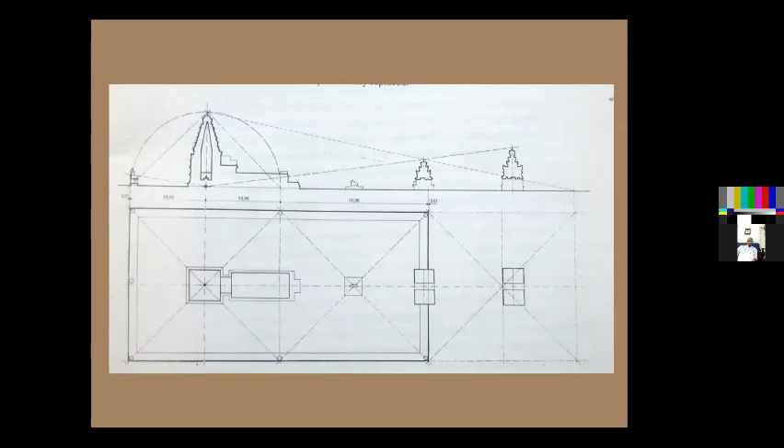See the foundation. In modern engineering, we say raft foundation. The whole thing is like the whole base. The existing foundation is only about 5 feet, 1.5 meters, and how they had prepared that. See, the first layer is laid in one direction. That is of granite pieces, approximately 3.6 meters by 40 centimeters by 60 centimeters, placed in one direction. The second layer is in another direction. The third layer is again coming back to the first, odd courses and even courses. They had arranged about 5 courses, over that the whole structure stands.

This acts like a raft. Whatever load comes, this doesn't have any unequal settlement. And they have done it on limestone. From where they got the knowledge? That is why I said the native engineering was very strong. They had all the basic things. See what they do, olden days, even in some of the villages still they do it. They'll excavate the whole foundation, not just below the walls.

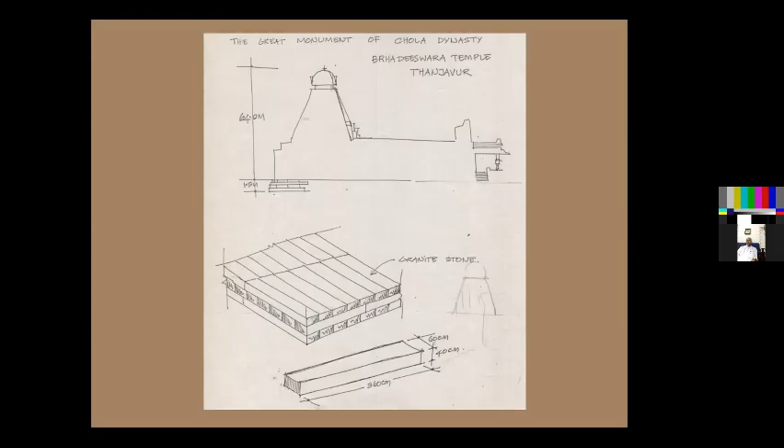If they are going for a structure, they will excavate the whole area and leave it for one season. They call it 48 days, one mandala, and leave it, expose it to sunlight and expose it to rain. Then the whole thing settles. Then they start going in for foundation work. So like that, they had given a lot of time for each and every procedure. See this, they have stacked one over the other, there is no mortar in between.

I am restricting myself to the temple construction, right? Even for a secular building, you should understand, this is the best example, a living example, 1,000 years old. We don't have a house about 1,000 years old. We have houses about 150 years, 200 years, not to this extent, but still, this is a place where we could see there is no mortar in between. See how they have placed it. This is a cantilever, this is a counterweight, and again a cantilever, counterweight, like that.

All these things come in the temple grammar. Everything has got a proper height, proper width. All those things come in their calculations. They take the unit as the main deity in the sanctum sanctorum. From there, all the multiplications start. First, the whole sanctum sanctorum in this temple is about 24 feet square. So from there, the whole thing starts.

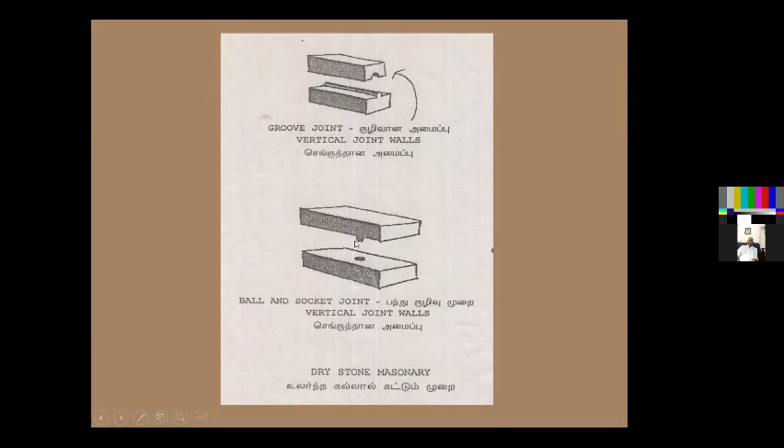Interlocking joints, all done in stone, mind you, not in wood.

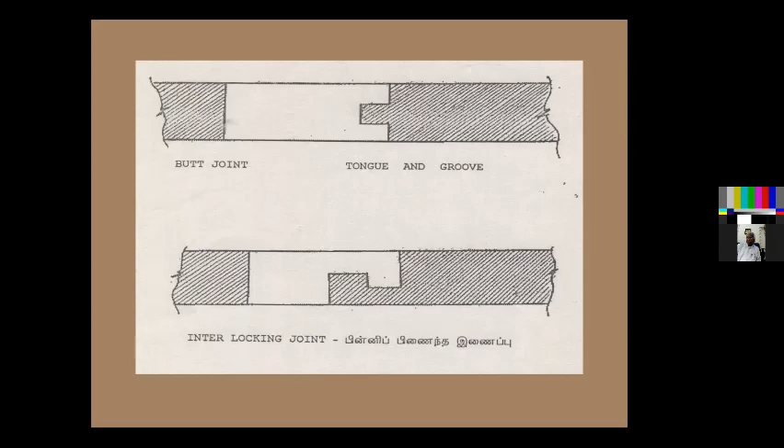See this, the ball and socket is an exaggerated drawing. This is how the whole stone stands. No mortar in between, mind you. And they have understood the basic structural principle of loose joints. See, that is a loose joint. Even when there is a mild tremor, it gets settled. It gives a small movement and then settles. So that is one of the highly technical knowledge points. If you have a loose joint, it doesn't fall immediately. It will accommodate the shock and adjust.

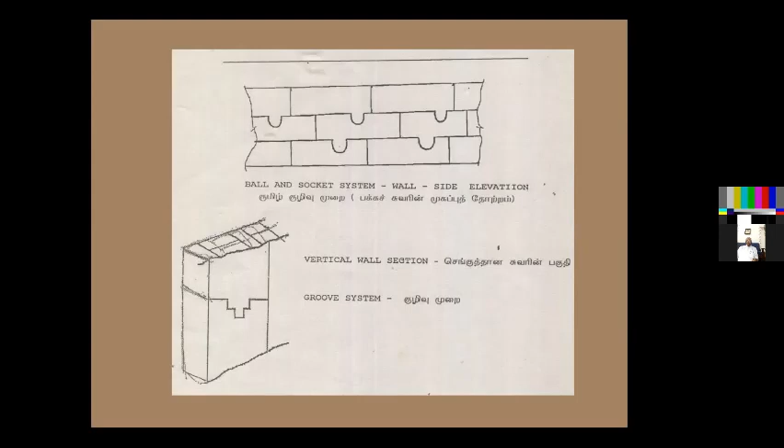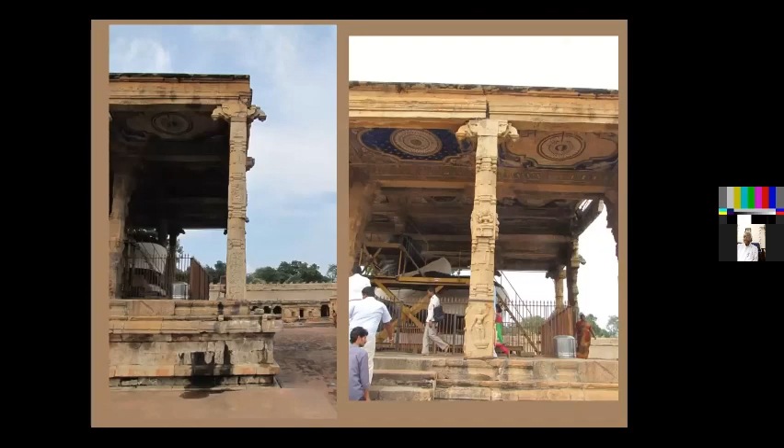See, coming to this, one of the mandapas here, I've taken this to explain to you a very simple principle of how the column stands, and what we are doing now. See the difference here. This is a column, an independent column, a freestanding column you can call it. The column is from here to here. And it stands on another rock, a rock bed. It's a bed block, you can call it. And it stands freely without any connection.

And there is another block here. This is a bed block to take the load of this beam. And this is embellishment or an ornamentation which gives beauty to that. They could have left it like this, but they would not. They have used these motifs. It is something like the banana flower. See this, they call it.

See the column size at the bottom, and the column size at the top. There is a small difference. The top is slightly smaller than the bottom. That itself makes it stand. Purely on gravity, it stands. Nearly about 650 years. This was built by the Nayaks. 650 years, and the column is a loose joint.

But how we do the column now, in modern engineering, we dig the foundation. In the hole, we go down and make a broader footing. With the steel rods, we bring it through the column to the top. The column is continuous from the foundation. We say the load gets distributed along it. But here also the load gets distributed without any connections from one element to another element.

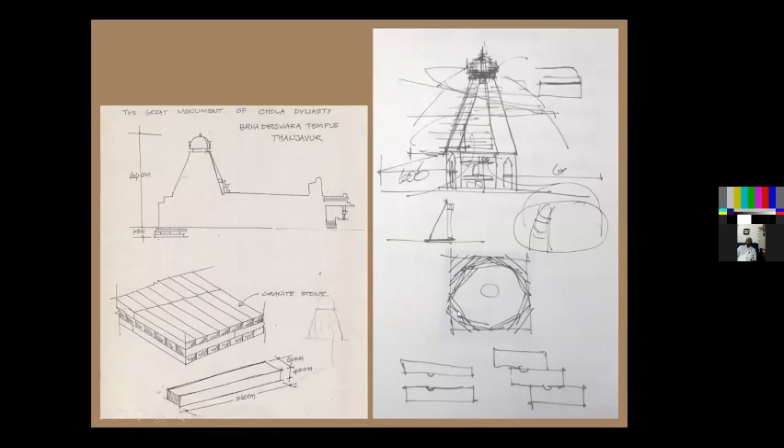Acting on it. It can take another 4 times more than the existing load. So on the calculation of soil mechanics, how they did it, we don't know. See this, 47.4 tons per meter square, and the resistance from the soil is 162 tons per meter square. So nearly 4 times the soil can take. So they have chosen the soil in such a way.

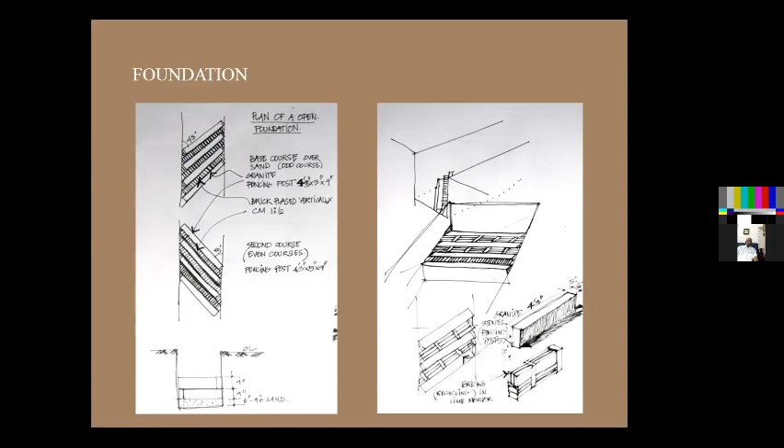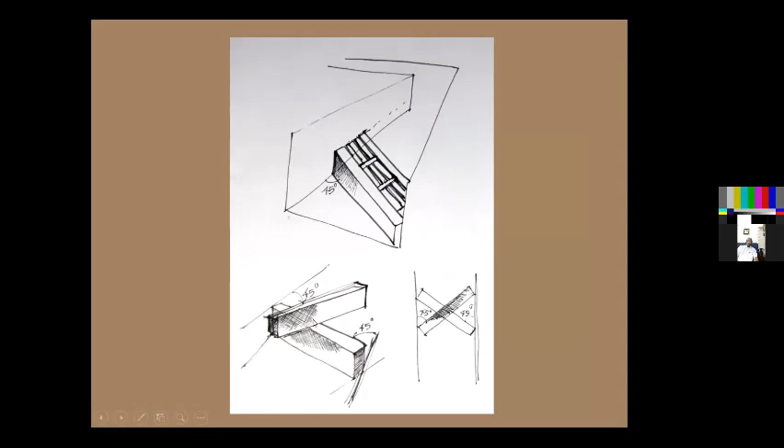About 45 degrees. See, look at how the wall, one stone is placed over that in 45 degrees. I have marked it here. Look at this. So whatever the load comes, it gets distributed throughout, and then again goes to the bottom like this. So once it goes down, it will be minimum. See the plan here.

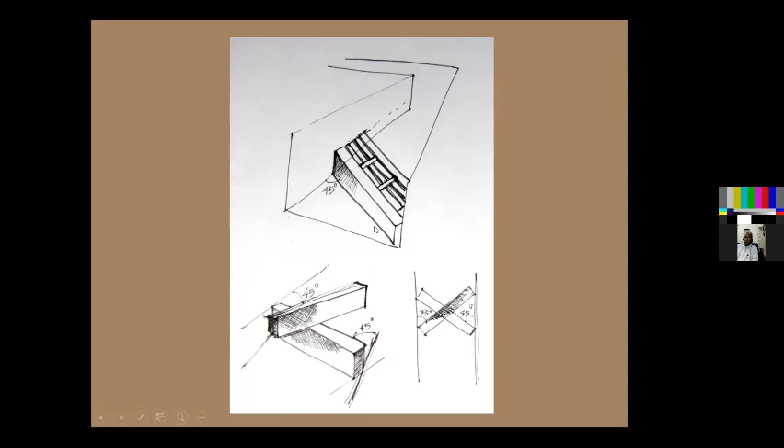At the right hand side of that. Look at this. This is a plan. This is a view. And this is another view. Foundation. See some of the existing structures. We have all precast. This is removed. You can remove piece by piece from top. Again, reassemble. While removing, they'll do the markings here, numbering, and then they can replace it.

That is why we say, even though it is a tension member, it stands on compression. In fact, whatever load comes over it, it's converted into a compression member. So even if the load comes over it at the cantilever here, it will be like a compression member only, which is attached. It stands on surface tension. The mortar is fixed on the brick on the sides.

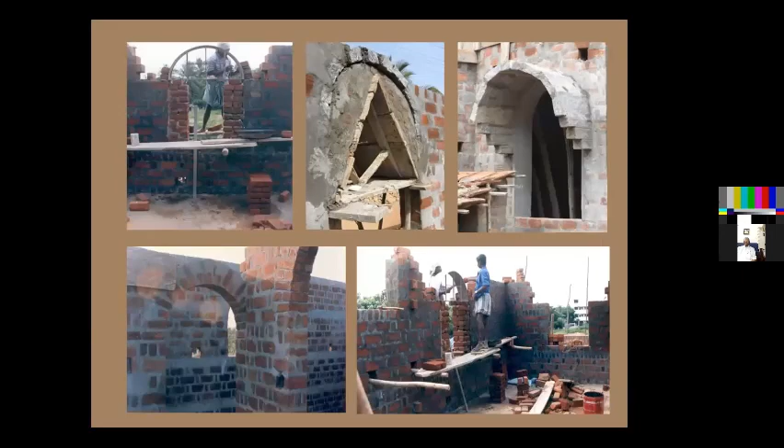For this, they'll prepare a mold at the bottom, and over the mold, they'll go on placing the bricks like this. And after setting, they'll remove that. There is no steel, no foreign body in that. In a cantilever, they had done it with brick. This is Marathas' work. See, in the same work what we do now, in many places, for all the compression members, they were using steel.

You don't need it. For a compression member, the curve itself takes the load. What is the arch? Arch is a compression member. Whatever load comes over it is transferred through this side. See, this is a 9-inch. If you do it with compression members, your cost of the house will be less. See this, I have used granite. No joints. The mortar is only lime mortar in between.

Lime, jaggery, and then we had also used very well ripe plantain fruit. And see this, it stands. Initially, you have a formwork like this, do the construction at the top, then remove this, and it stands. Very simple.

As an engineer, as a basic principle, we cannot accept steel in all the compression members. Why do you need steel? Once you put a foreign body inside, it gets corroded, it swells, and creates a lot of problems. So in a compression member, use only natural materials in the form of an arch or a segment of an arch, and it will stand.

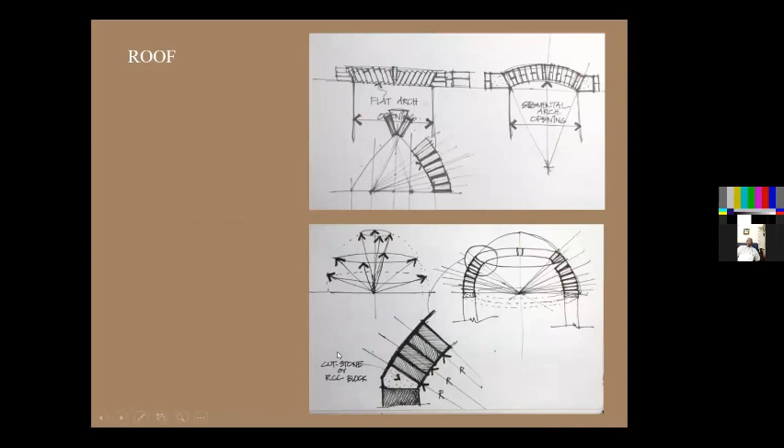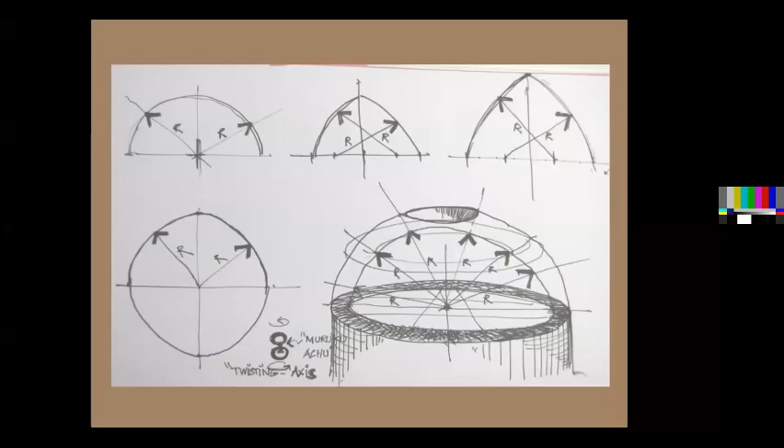The best example is a bamboo basket. When they make a bamboo basket, they do it with individual elements, and one method of doing it. I think I've given the basic principles.

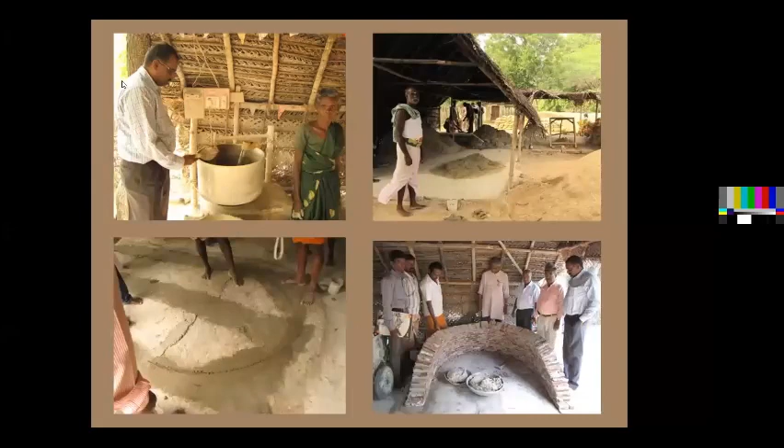See this, one of our great architects, Ramalingam, is inspecting one of the sites. We have done it with lime mortar and placed it. There's no steel in this whole structure. This is myself. See the curve, see from here.

It is a 2-point arch. From here we take this radius, and from here we take this radius, and it converges. You have a threaded wire from here and here, and you go on keeping the bricks at the same inclination as the wire travels, and you get this; it is converging.

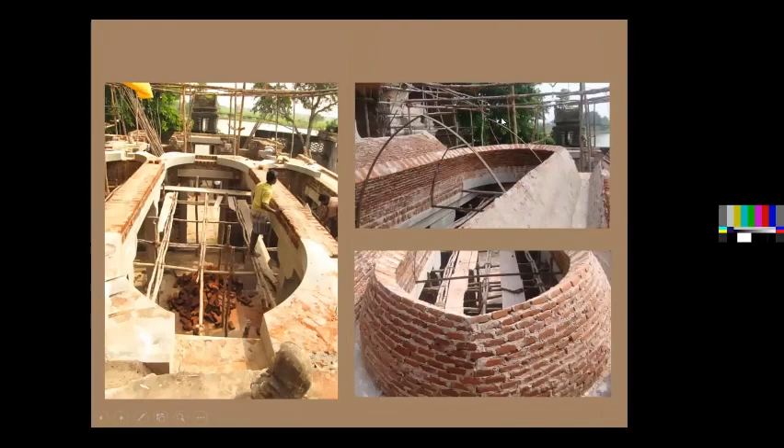See, look, we need only a guide like this. See this, it is converging. And here the springing of that place, we have done it with the squinches. Squinches we have done with the granite. With the modern machines, we have cut it to the required curve, and then we have placed it. The load is distributed on this.

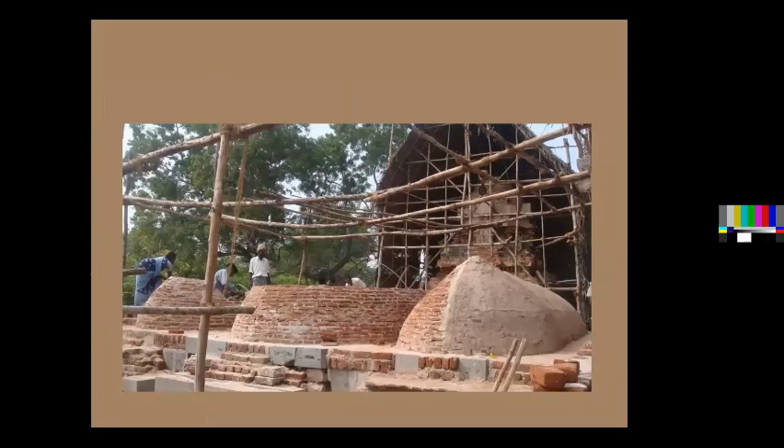See, one of the temples, about 850-year-old temple, was renovated like this. See the existing one, see the bricks, how it is interlocked. This is also about nearly 800 years old. Look at this, how it is done. But one bad thing they do is, when they do the repair, they do it with cement. They have plastered it with cement. They should not do it. They should go for lime mortar.

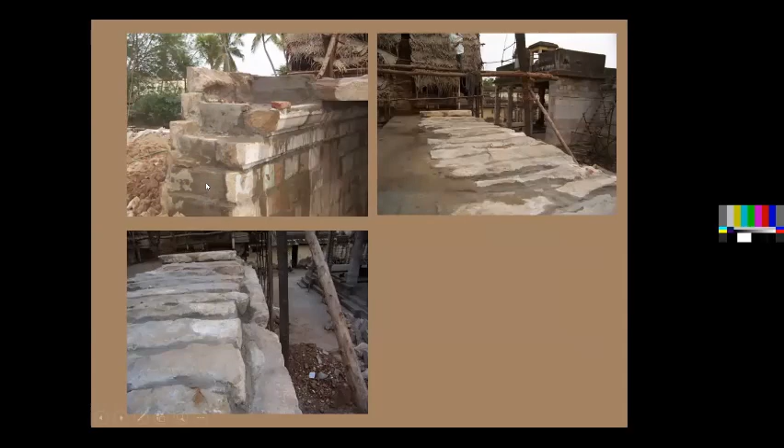See, for students, we teach how to make a dome. I think this is how the temple roofs are done like this. This they call it wall. The wall also, it's a two-walled wall, and in between it is filled with granite and lime. We call it the diaphragm wall, this wall. Over that, there is a bed block, small projection. Then here another projection. Over that, they have this type of stones.

They call it in Tamil, pavkal. And this is about 1.5 feet width and height about 9 approximately. The length is placed, and over that they put lime mortar with screed, like a small surki. Then they make it level at the top. This is how the temple walls are done, traditional temple technology.

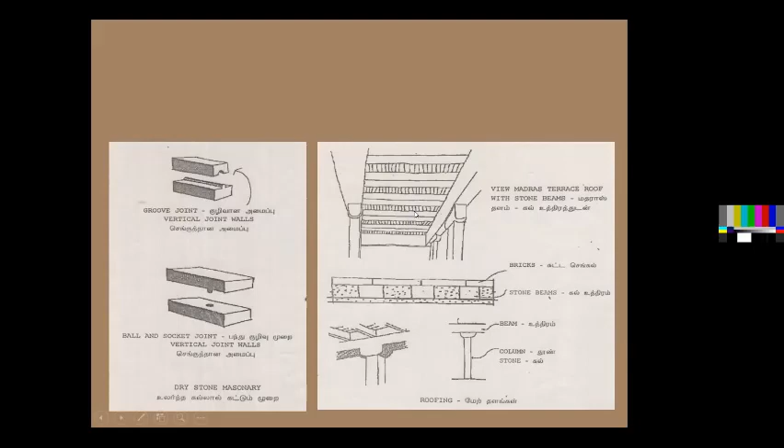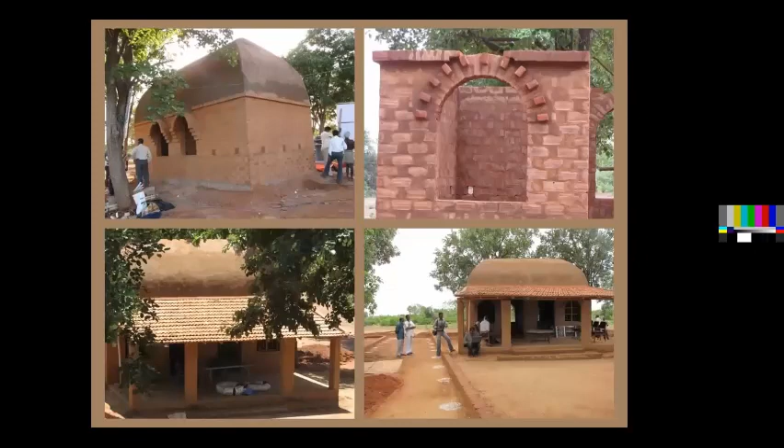Octagonal dome. The whole temple at the top. This is same thing, a combination with mud. And we have done a government work building, a combination of the Rajarajan wall and a 4.4 groin vault at the top. We have done it about 5 years back in Tanjavur, Tamil University.

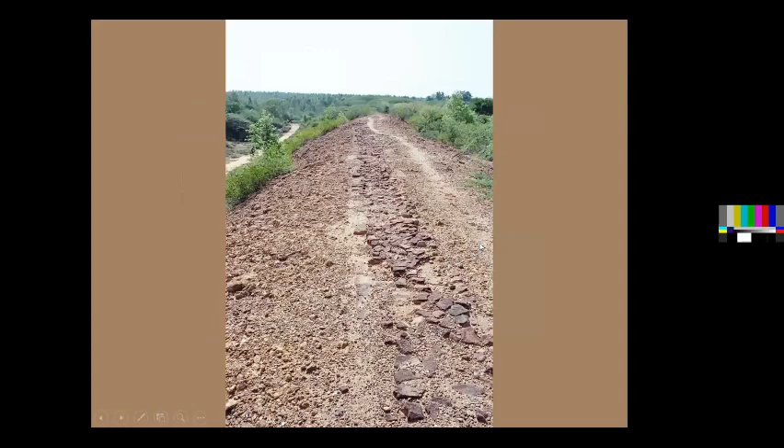And there we got some very good samples of brick. I'll show you the bricks also. See at the top, a huge chariot can go on that. This is approximately 10 to 12 feet at the top. And this height is about 30 feet from the ground level. And see the brick, how it is. All huge bricks were seen on the top.

The brick sizes. Myself and Kudavayil Balasubramanian, a great authority on the Chola dynasty. He's still living in Tanjavur. I'm very lucky to have him, and I learned a lot of things from him. He's Dr. Kudavayil Balasubramanian. He has written a lot of books on the Cholas. So we went there once, and when we went there, we took a photograph.